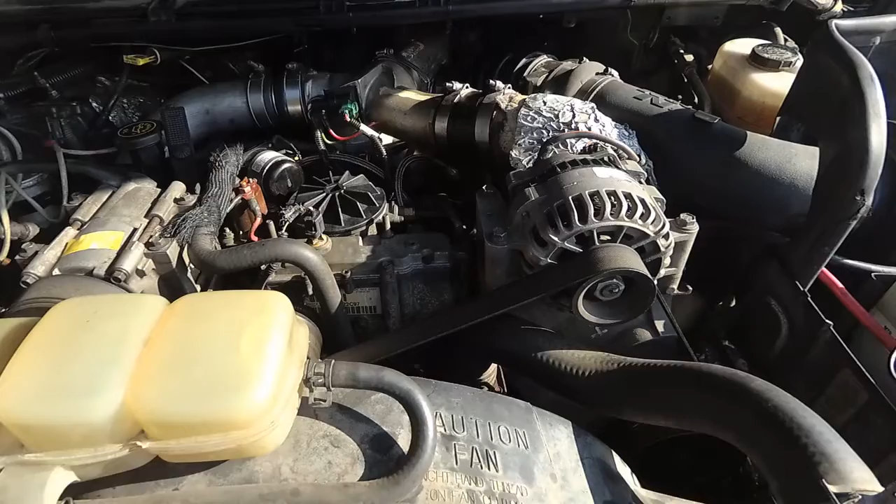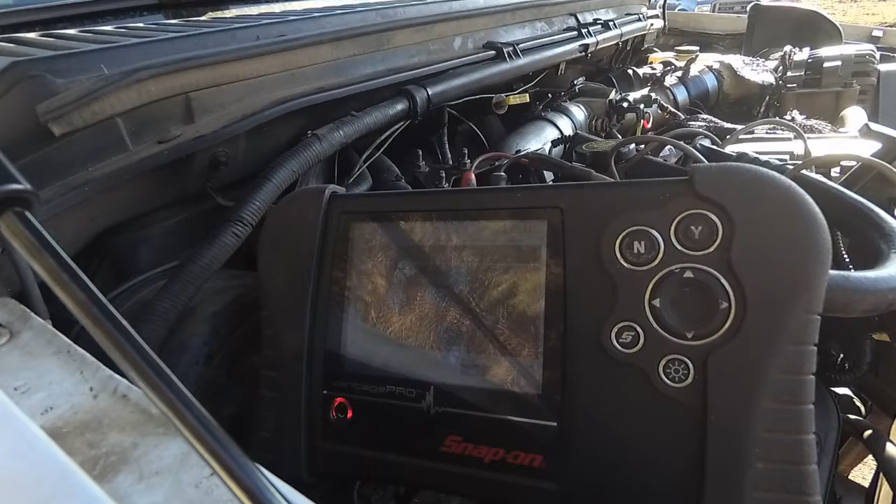So today we have a 2000 Ford Excursion with a diesel engine here. I think this is a 7.3 diesel, and it's here for a hard start cold problem. So the first thing I'm going to do here is set up the amp clamp over the glow plug controller wire and record the current that the glow plugs require, or actually take, to see if the glow plug system is functioning. I find that to be the most effective approach, and if the current is low, then we'll individually check the glow plugs.

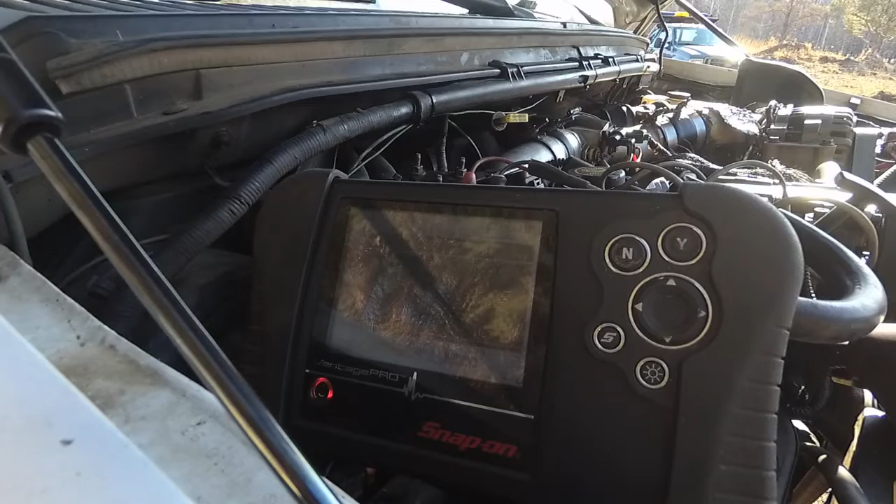At the same time, I'm going to set the scan tool up to record actuation oil pressure during cranking and engine RPM. So we'll get that set up and we'll give that a try. I'm not worried about having to watch this graphing meter because it's recording right now. I'm just going to zero the amp clamp. There we go. Half an amp right now. Okay, so we'll set up the scan tool now. So that's a good start.

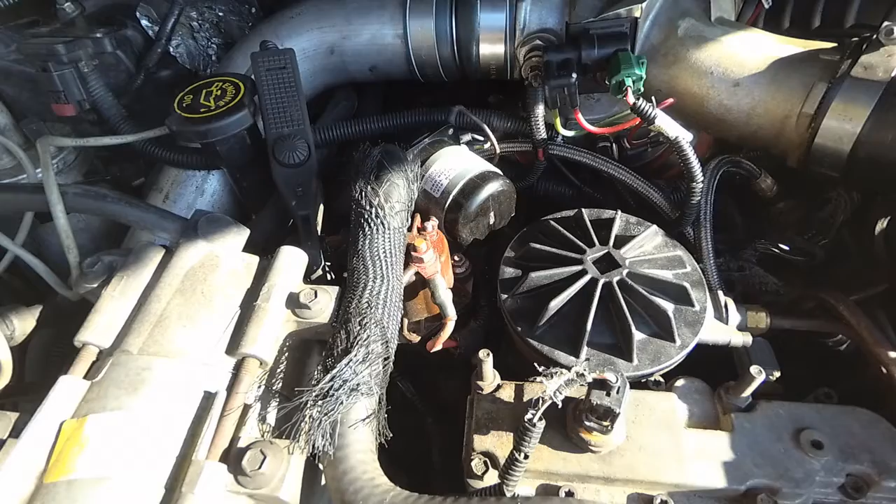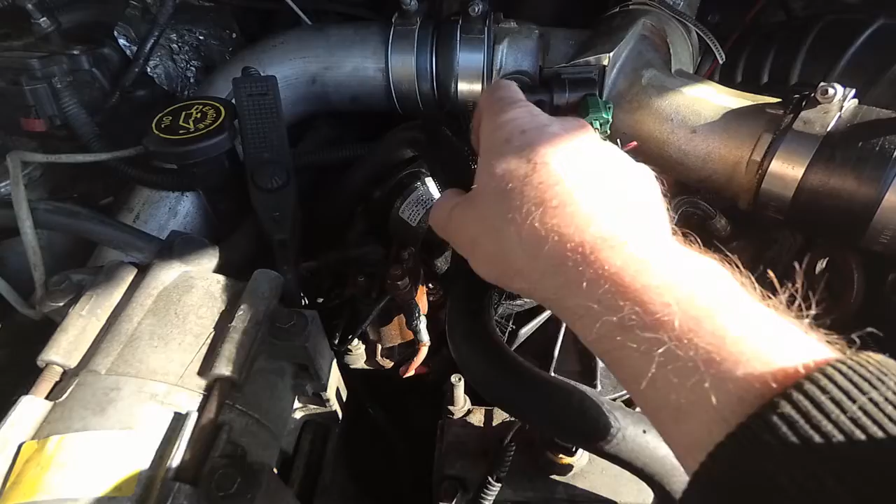First thing we noticed is that the glow plug controller did not energize. So we had no current flow. So we obviously have no glow plug. So that'll be a huge hit on starting this thing. So we're going to check this controller circuit. I'm pretty sure that one wire is grounded all the time, and this is the control here, but we'll double check that, get some test equipment out here.

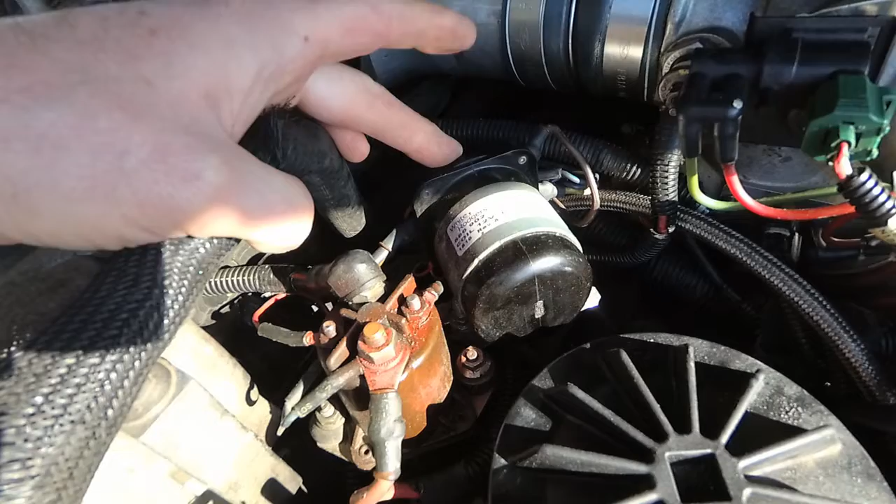Okay, so I see he's got an aftermarket glow plug relay. That's this one here. I wasn't checking that one, I was checking this one, which I believe is the intake heater, but they both should come on simultaneously. I'm going to recheck this. I never heard any relays clicking on, so I'm suspicious that the control circuit is not functioning here. This red wire should be power. I'm going to have to look at this one to see how it's designed. I'm going to get a picture of the wiring diagram here.

So here's a picture of the glow plug relay and the intake manifold heater relay. They both have the same power supply from the right side battery, and looks like the red wire would be voltage or power. Yes, 12 volts, it says right there, 12 volts on it. And we're going to make sure that that has 12 volts, and the ground side is controlled by the PCM. So there is a possibility the PCM thinks the engine's warmer than it actually is. We haven't looked at data yet.

We're going to see if we've got power on both these two red wires at the glow plug controller and the intake heater. And then we're going to look at engine data and see if the PCM is recognizing the correct coolant or air temperature, could be coolant, air, or oil temperature that it uses to establish whether it should activate the glow plug heater and the intake heater. But they're not coming on, and that's going to have a huge impact on startability. Customer did say it starts reasonably well if it's plugged in.

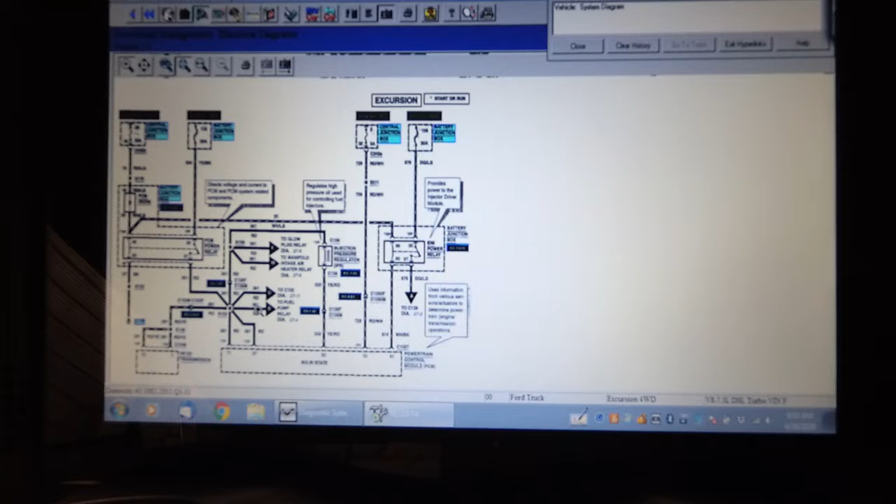So the power supply for both those two large relays comes from circuit 361, the red wire, and that is supplied power from the PCM relay. I'm sure that relay is working or the vehicle wouldn't even start, because that relay supplies power to the powertrain control module. So we want to make sure we have power there at the glow plug controllers, on this circuit with the key on, and then we're going to look at data.

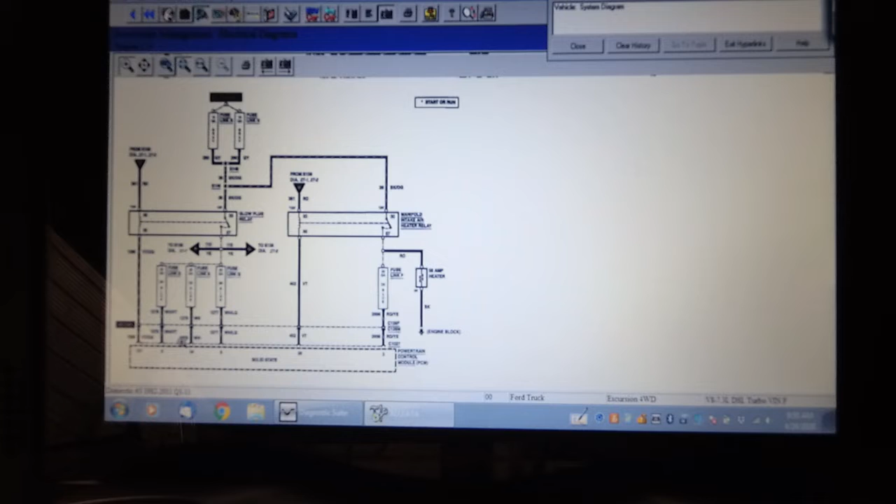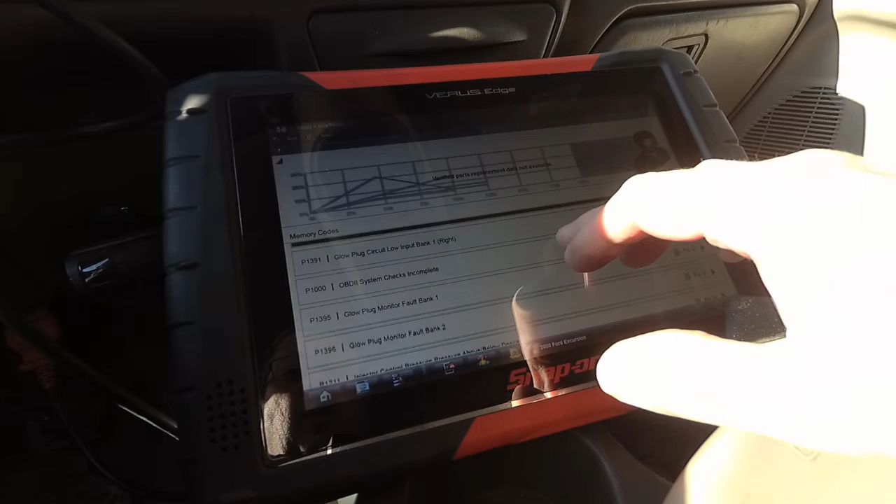So with the ignition key in the run position, I do have power on circuit 361, the red wire on the intake manifold heater and the glow plug relay, and we have 12 volts on the control side of it as well, which means there's no ground. So let's look at data. First thing we're going to do is check for memory codes here. Oh, look at that. Glow plug, glow plug, glow plug, and ICP pressure above normal. Well, high ICP pressure won't cause a no start, but these glow plug issues might. So I don't know if those codes were generated recently. Let's clear them.

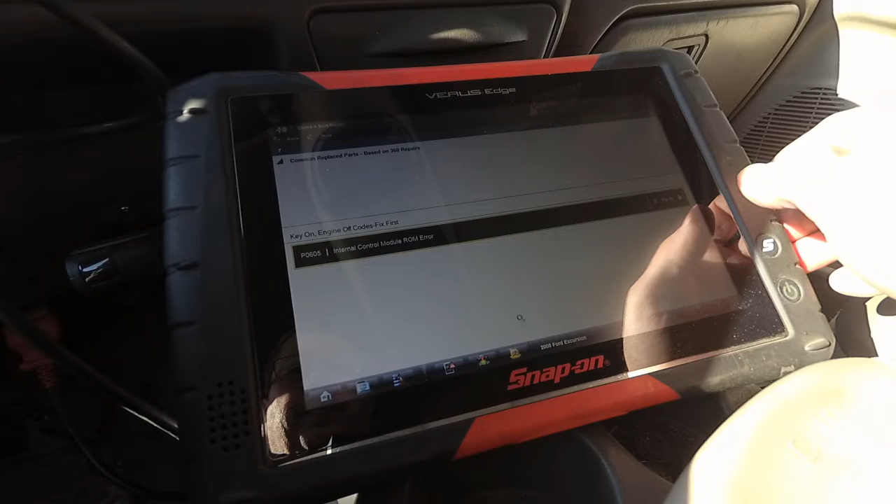I haven't cranked this thing yet. And exit. And let's do key on engine off self-test. It'll probably flag a code for being too cold, but it should test the glow plug circuits. Internal control module ROM error, but no glow plug codes. Alright, we're going to look at data.

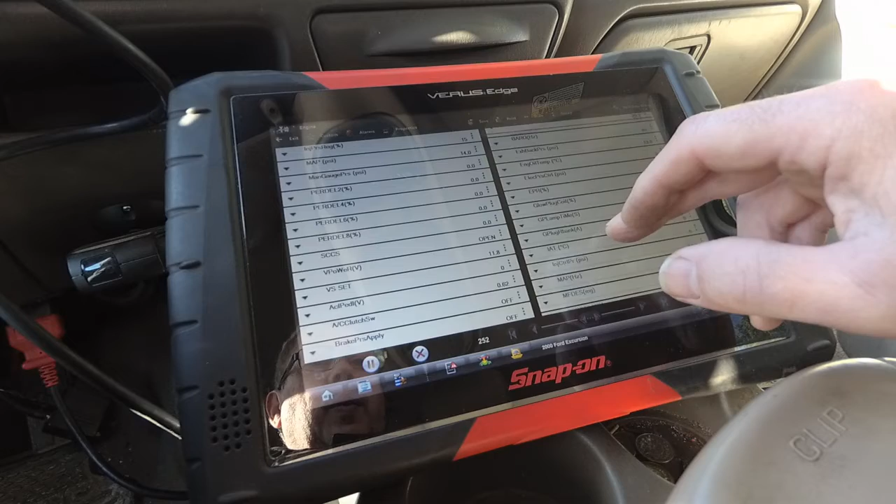So I'm looking in the data list here, and I see engine oil temperature at 4.4 volts and 3 degrees Celsius, which is about right. Intake air temperature 5 degrees Celsius. And let's see if we can find engine coolant temperature. I don't see it in here. Intake air, oil temperature, no, I don't see it. I'm going to build a custom data list.

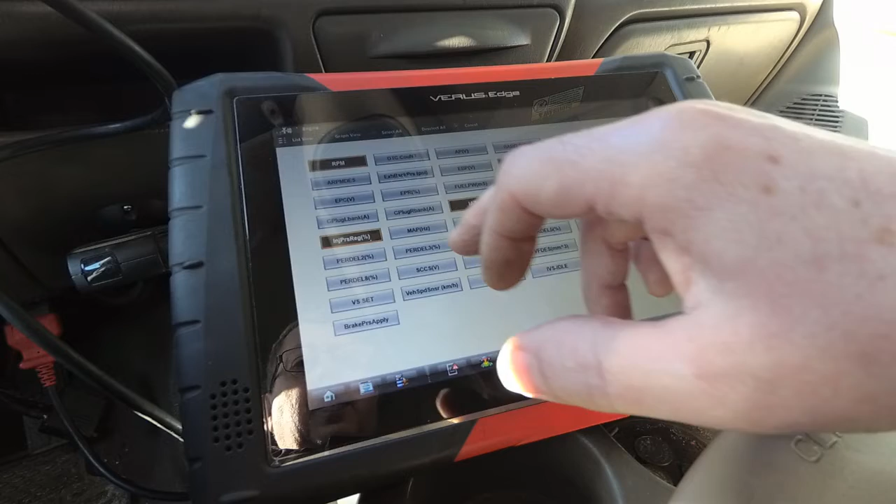Deselect everything. I'm going to go RPM. Oil temperature. Might as well take it in voltage as well. Glow plug percentage, glow plug time. Intake air temperature, ICP, injection control pressure, and the regulator. And I guess it doesn't have an actual coolant temperature in this data list.

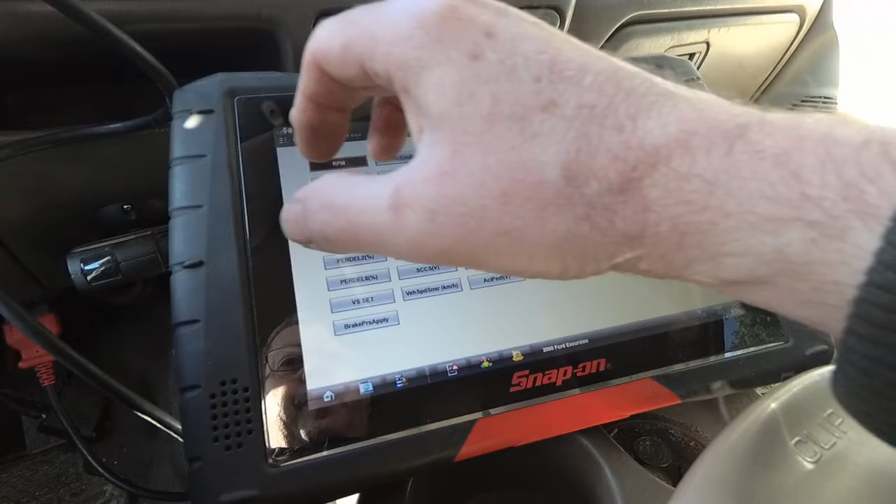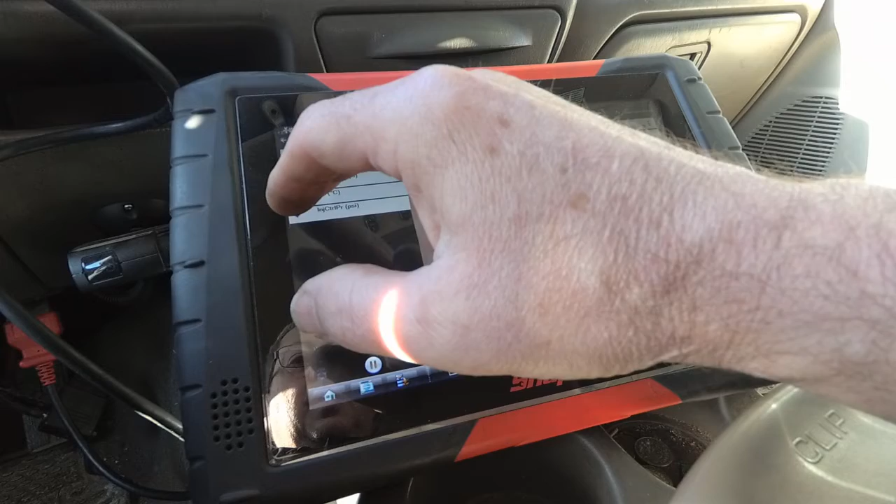So the temperatures look reasonable. Let's see if it's actually commanding the glow plug on time. Right now it says 0. I'm going to cycle the key. Hopefully we don't lose the data list. Yeah, see, it's commanding it on, yet it's not working.

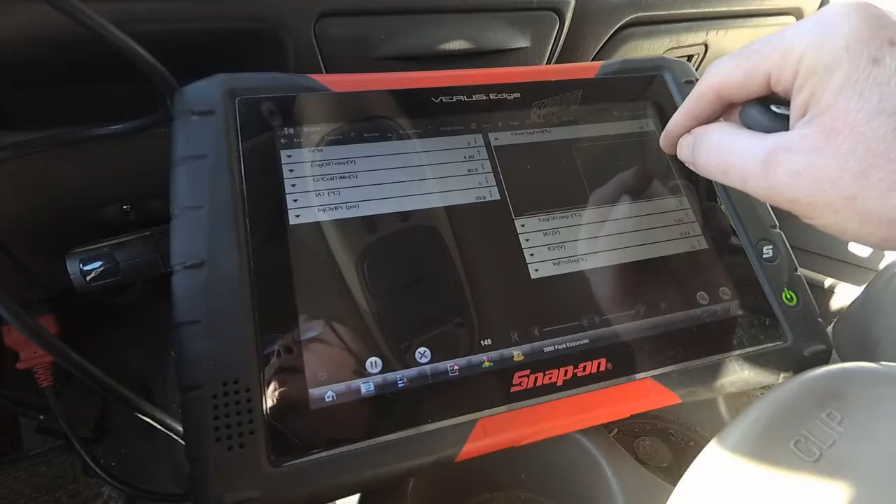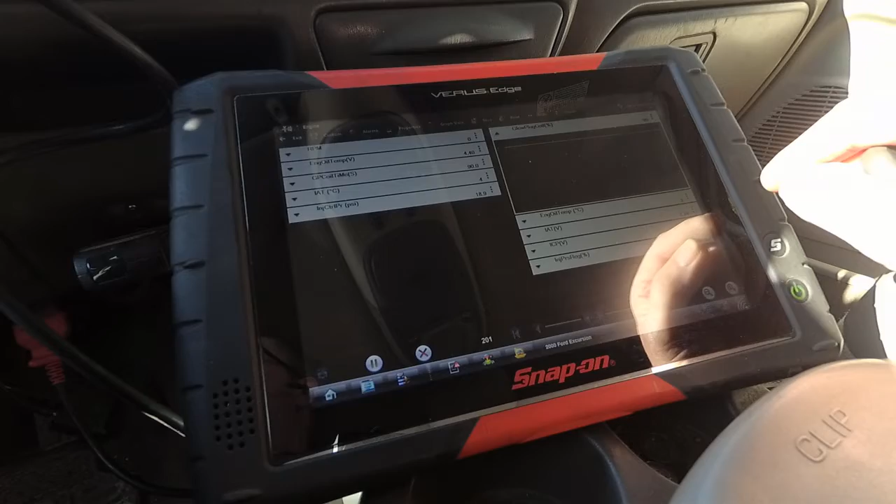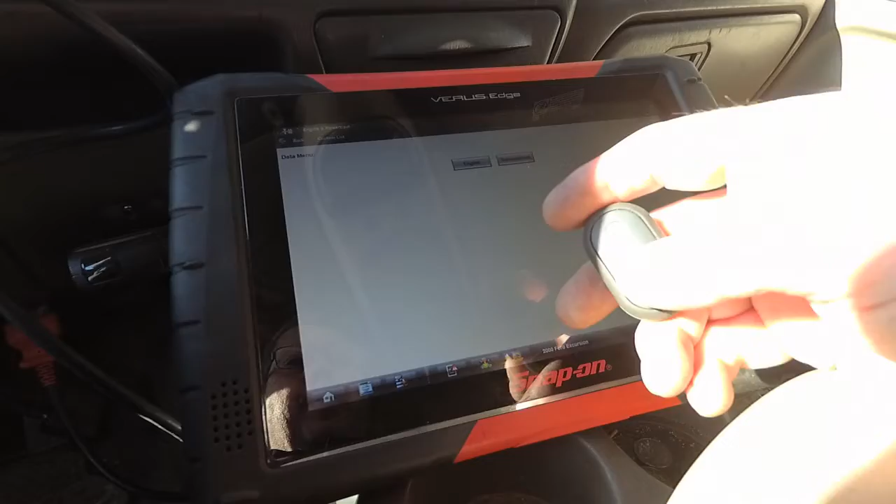So hard to see the dash indicator in here with this sun shining in here today. Well, it's commanding the glow plugs on, but it doesn't appear to be working. Look for a bidirectional test here. So here is a glow plug test, including power accessories. Continue.

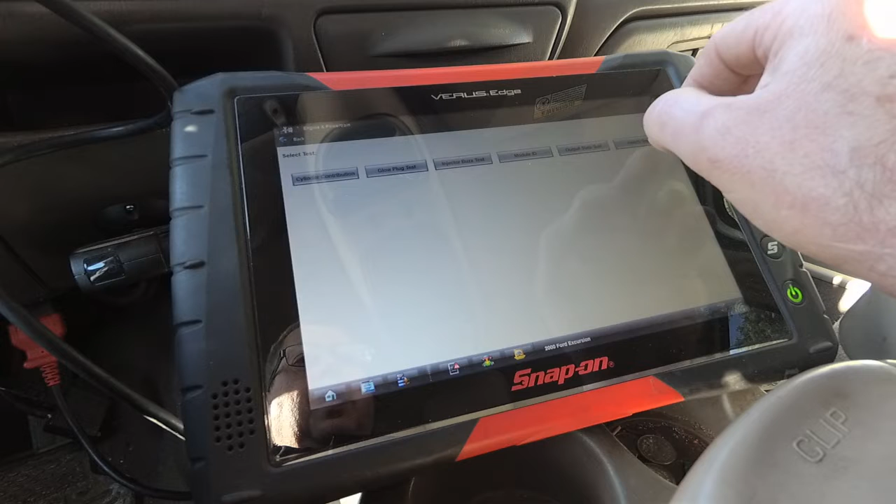Battery voltage must be 11.8 to 14. Test abort. It's supposed to do this test running. Well, let's put a test light across that circuit. There's no other bidirectional control of output state. What does that do?

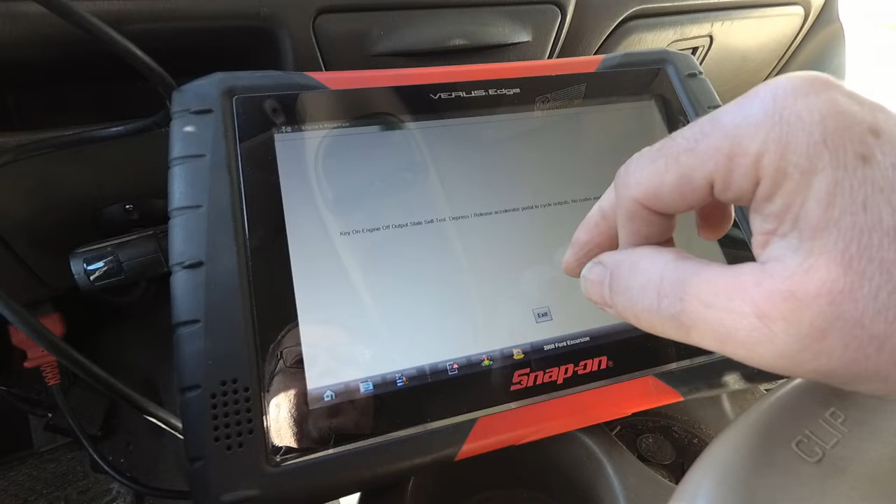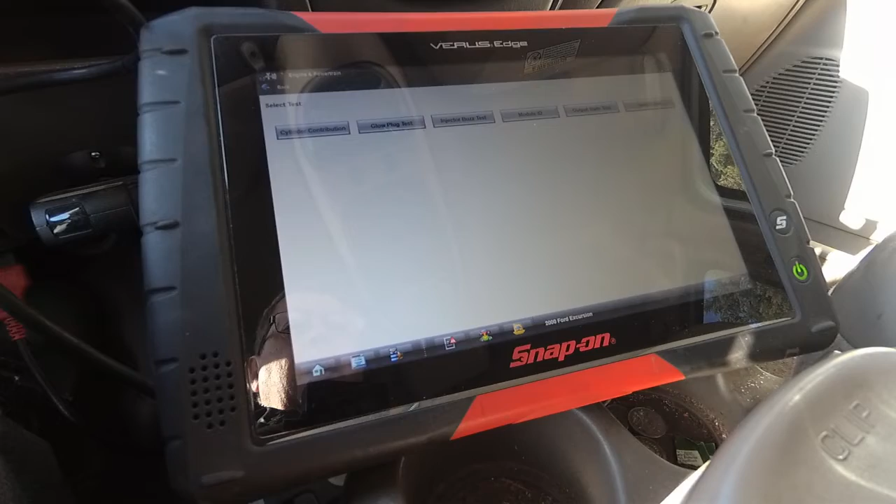Engine off, turn off AC and all accessories. Release accelerator. Okay, so that should energize various. You can hear the lift pump running. And every time you cycle the key. To press brake pedal. Alright, well that doesn't do it. Well, let's see if we got a ground on that glow plug controller.

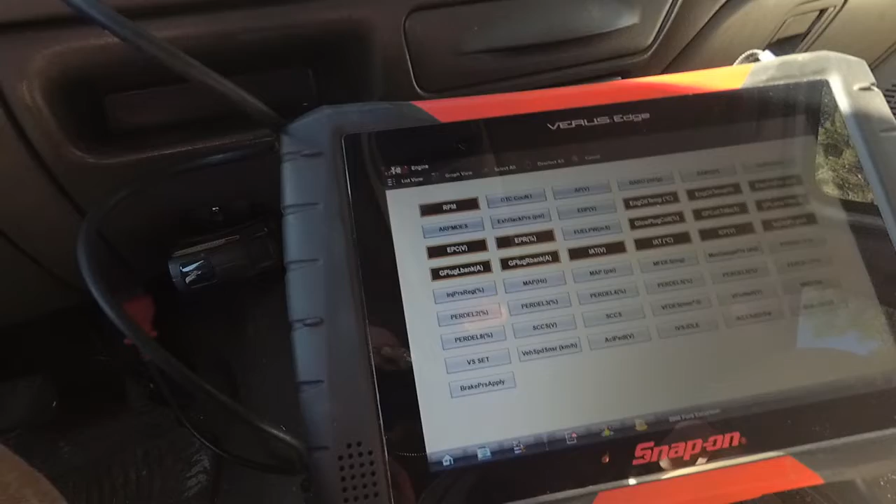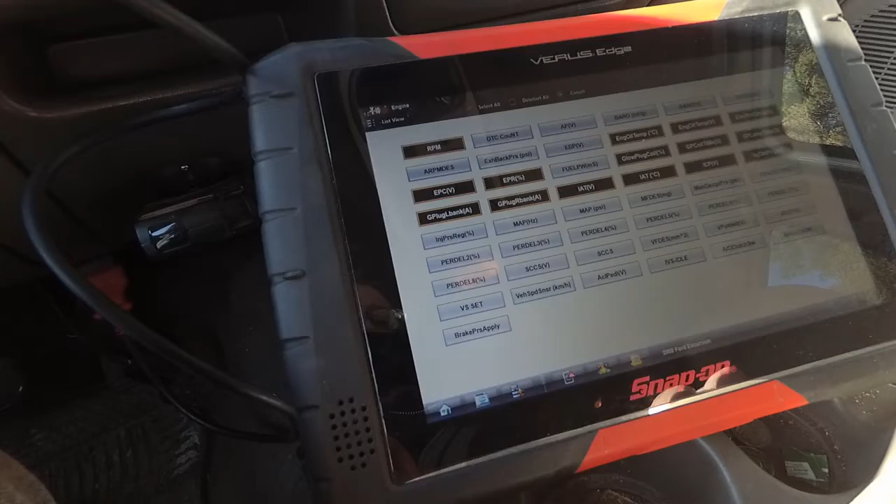So I've determined that the PCM is not supplying the ground to the glow plug or intake heater for whatever reason. So I've got a remote start button hooked up so I can remotely ground those two relays. When I do, the glow plugs draw 160 amps and the intake heater I think was 35 or 55, I can't remember. So I'm going to start looking at data here. I'm going to simulate a normal operation of the glow plugs and then see how this thing starts.

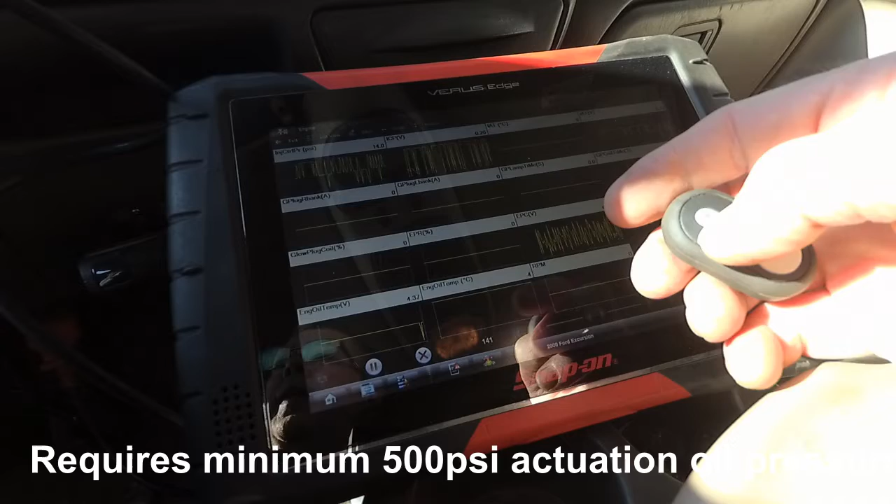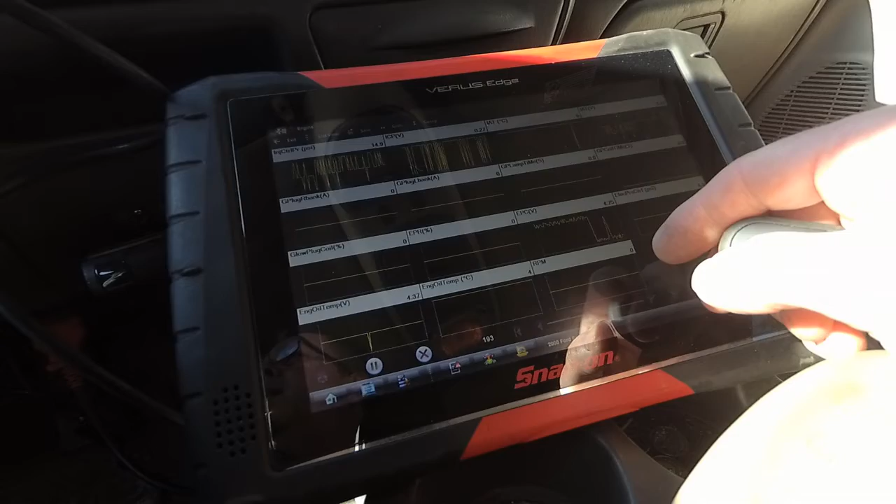Get set up here. Sorry for the glare here, it's quite bright. So where's actuation oil pressure, injection control pressure right there. This needs to hit at least 500. Okay, so I'm going to put the glow plugs on. Should be enough time, I would think. We got oil pressure. We got 500 pounds of oil pressure.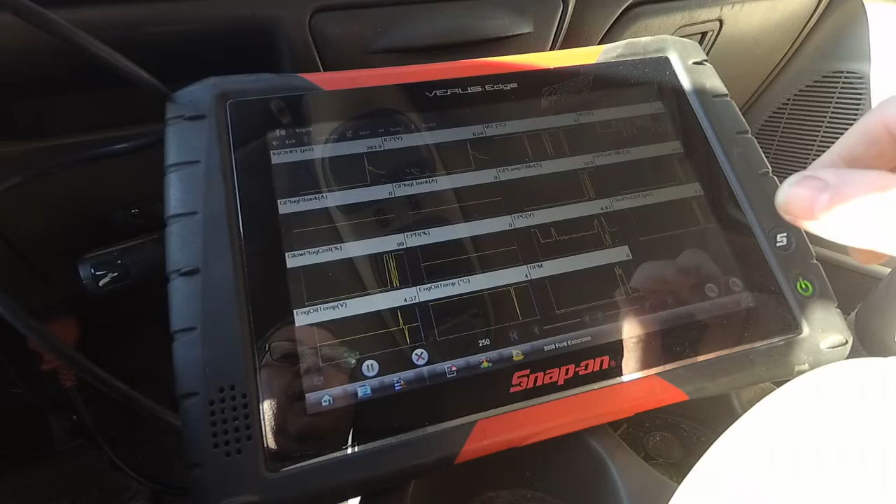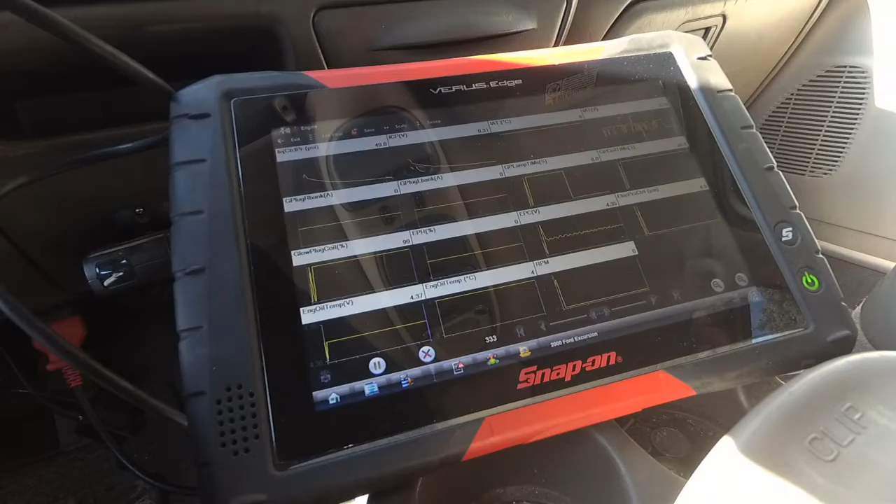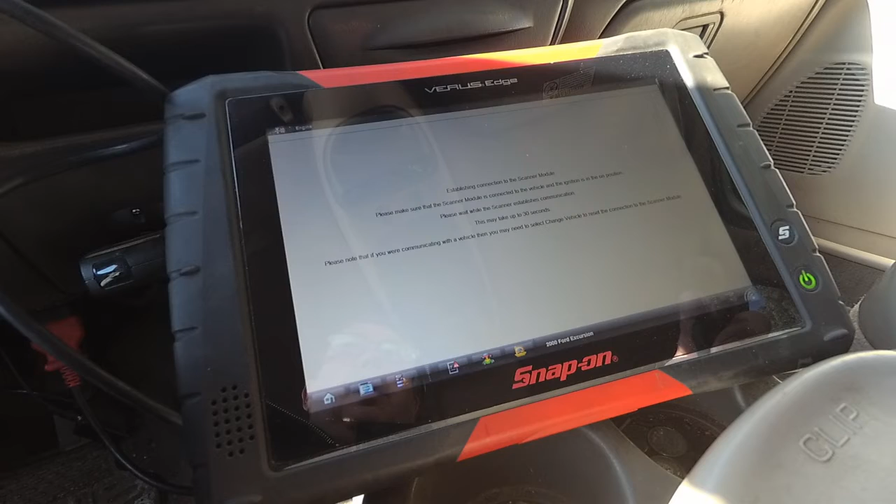Let's try cycling the glow plugs again. It's certainly not cranking very fast. Where was engine RPM? 106, that's not fast enough. No, it's never going to start. It's not cranking fast enough for one thing, but the glow plugs aren't working. The battery voltage went so low it stopped the scanner here. So let's get a booster battery out here and see if we can try again.

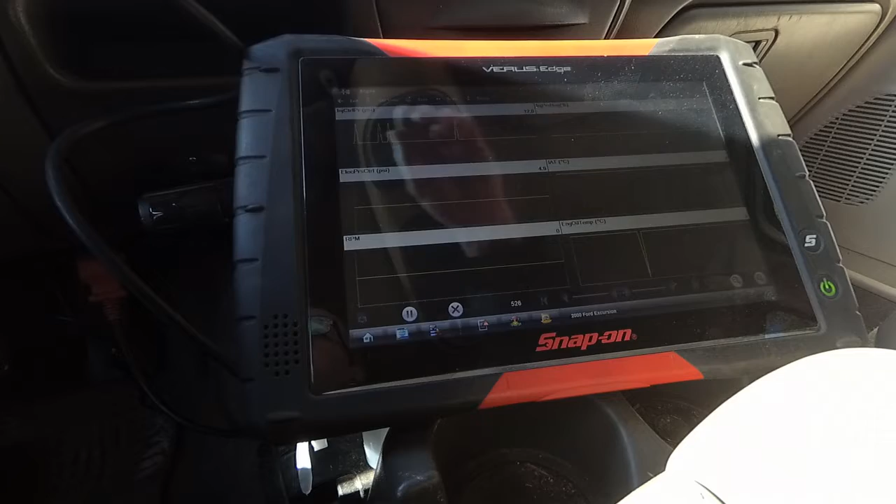Okay, so I got a booster battery hooked up to the right side main battery, and I got the jumper switch set up to bypass the PCM control of the glow plugs and intake heater. I'm going to turn them on now. I believe they're on. 1003, 1004, 1005, 1006, 7, 1008, 1009, 1010.

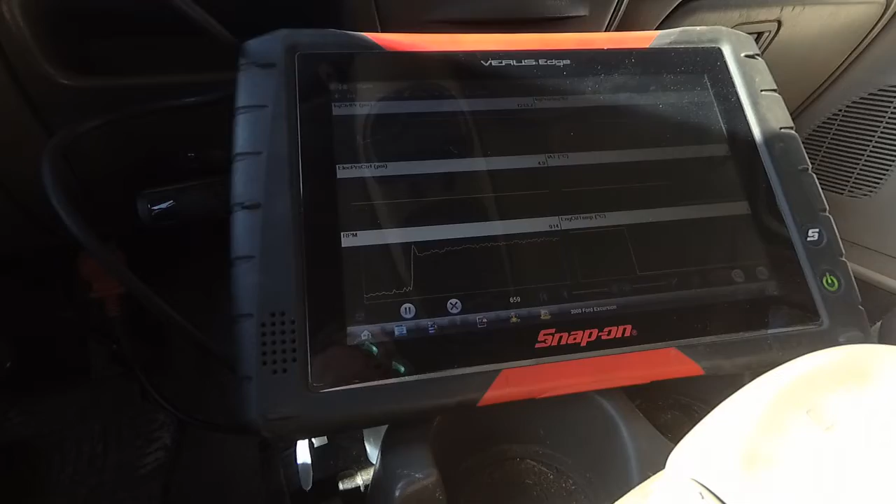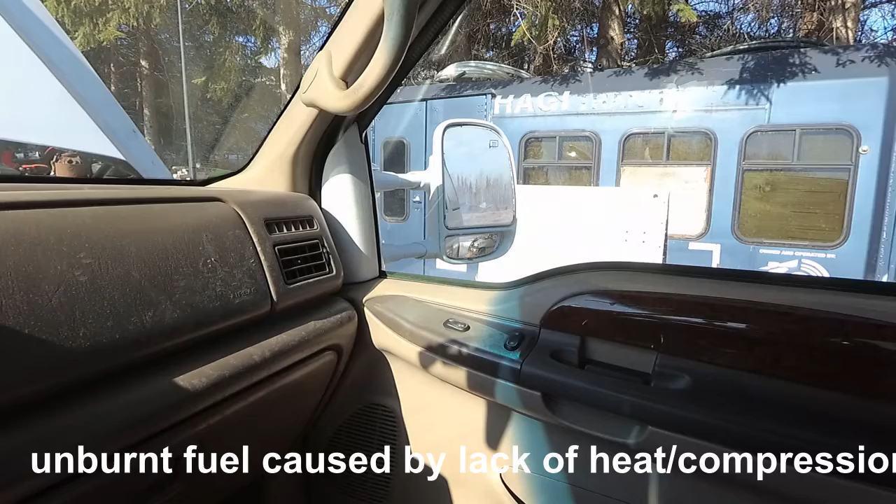It's got a miss in it now. Blowing a little bit of white smoke out the exhaust. See the white smoke? So it's got at least one glow plug maybe not working. It's also got a knock in it like an injector issue. Well, at least we can get it in the shop now and work on it out of the sun here where there's less glare. So it's in the shop now, semi-warm.

I ran a cylinder contribution test and it fails number 8 cylinder for balance. It also has this intake heater fault code. So there are multiple problems with this thing. There's either wiring issues or driver issues for the intake heater and glow plug control circuit. It has an injector knock. It might have low compression in one or more cylinders. We'll have to do further testing. And the batteries didn't allow it to crank fast enough to start if it had everything else going for it.

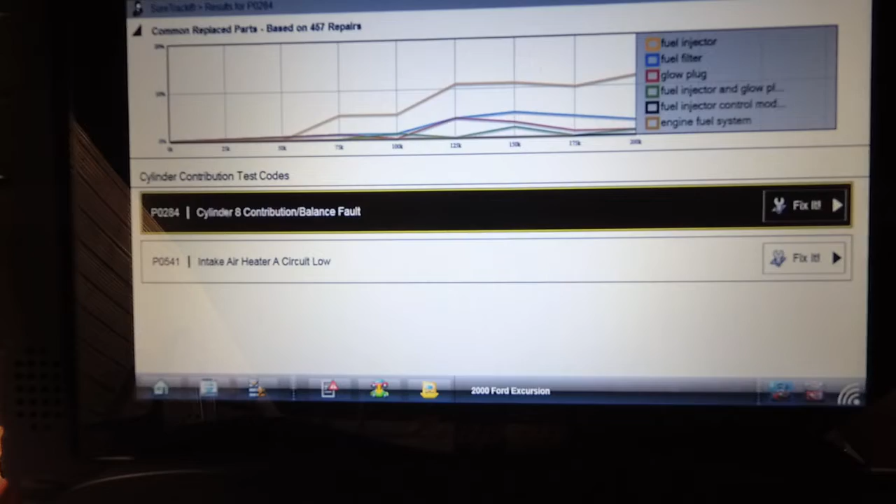One thing it does have though, we're going to look at the data that I recorded here. So I retested this aftermarket glow plug controller and it is being commanded on by the PCM, and initially draws over 200 amps. Mind you, now I have a battery charger hooked up to it, so the battery voltage is a little higher, so the current would increase. But this intake heater relay is not being commanded on, so we're going to have to check the quality of that circuit back to the PCM, and it's setting a fault code for that circuit as well. The other issue is the batteries are just weak and it's not cranking fast enough. We'll have a look at the data that I recorded on that cold start.

So here's a review of the data that was recorded during that starting event, and even with the booster battery hooked up to it, you can see that the RPM during cranking was only 106, 84, 90, 100, 130, 114. This thing should be cranking at about 200 RPM. RPM is critical on a diesel because of heat of compression. Low RPM, low heat. The good thing is, even at its lowest initial crank, we had 517 pounds of actuation oil pressure. So fortunately, it doesn't look like we have a high pressure oil leak in this system.

It's making oil pressure, but it's probably not making enough compression temperature because of the low RPM and the weak batteries. That, coupled with the lack of the intake heater, is really causing an issue. Now, there is a noise in the engine when it's running. We'll explore that once we get a little further here.

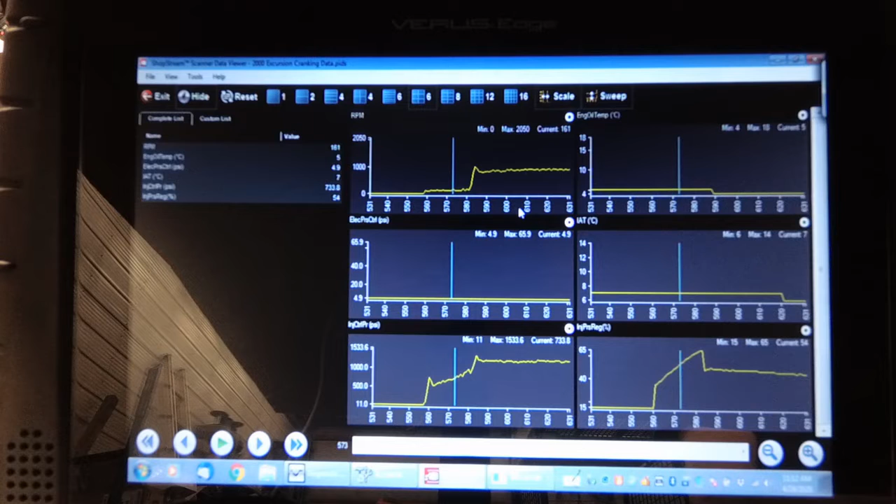I'm at connector 138 on the right valve cover. I'm going to check continuity of the wires. So we're looking at this electrical diagram, and what's of concern here is this violet wire from the intake manifold heater relay. It goes through connector 138 here. Let's see where connector 138 is. Obviously it's under the hood.

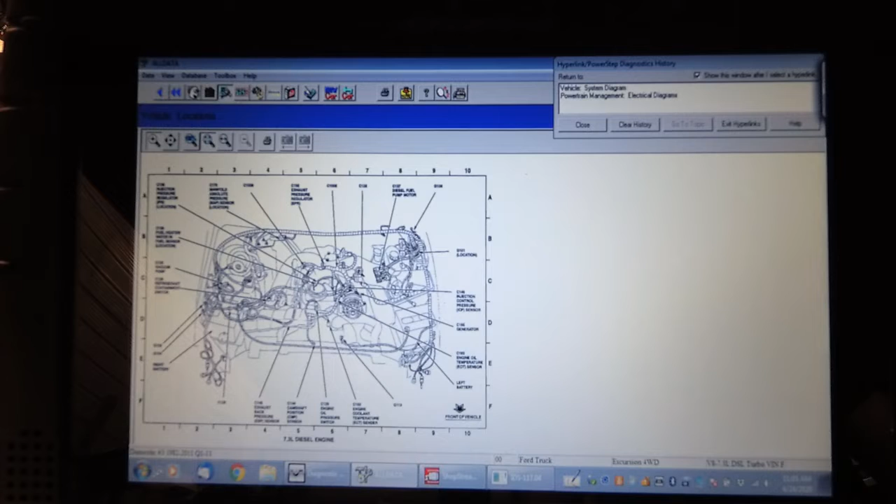135, 138, so it's over on the right valve cover. That would be a good place to examine that wiring right here, connector 138. Let's go back. Oh, I lost the diagram.

So we'll have a look at that connector and that violet wire and check continuity from the glow plug controller, I'm sorry, the intake manifold heater to that connector, and then from there to the PCM. So there's connector 138 on top of the left valve cover underneath the air induction. So I've got the air filter and air intake hose off.

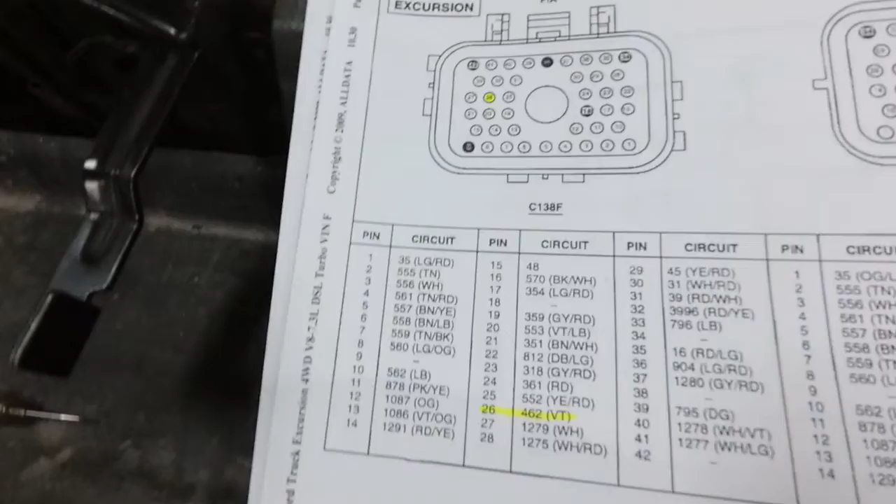So we're going to check continuity of the wiring from that connector over to the actual intake heater relay, and that is the violet wire, pin 26, circuit 462. So we'll identify that and check continuity of that wire. So we've got the ohm meter hooked between pin 26 and the control side of the intake heater relay up to connector 138, and it reads 0.04 ohms. So that wire is good up to there.

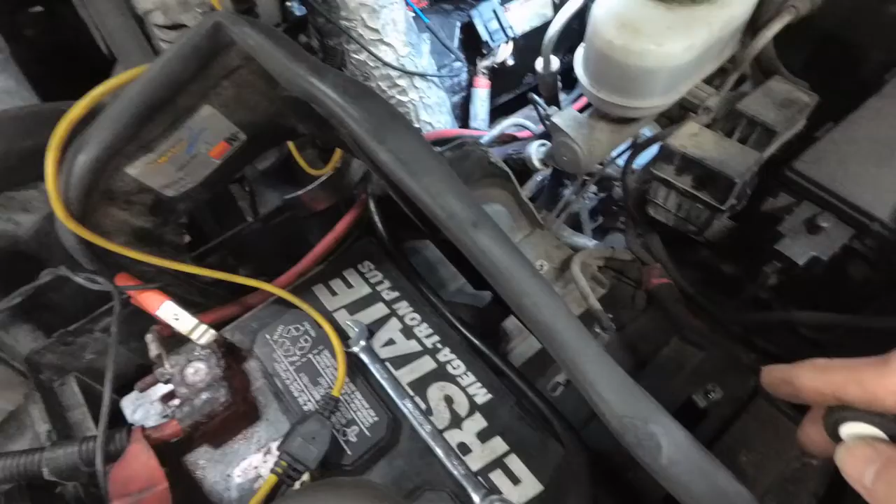So now we got to check it down to the damn computer, which is down inside the fender down there. There it is, way down there. Oh damn. I wonder which one of the connectors it is on the computer. Maybe I can get it apart. I don't see anything physically wrong with the wiring at this connector here. I looked at the back one.

So pin 26 is the third row down, second pin in, that's 27, that yellow one on the outside there, and then the next one in. And I don't see anything physically wrong with the wiring, but it very well could be open in here. You got to remember, these wires move with the engine and the vibration of the vehicle. So we'll get the connector apart on the ECM and check the continuity there.

So I decided to look up the theory of operation here. It says for the intake air heater to work, the ambient temperature must be below 0 Celsius or 32 Fahrenheit. So it was like +3 when I was trying this. So it may not have been cold enough for the intake air heater to come on. Oil temperature has to be below 55 Celsius, which it was.

Between 11.8 and 15 volts, probably not because the batteries are so weak. And automatic transmission must be in park or neutral, and glow plugs must be off. So it looks like the intake heater only comes on after the glow plug cycles off. But I do have a fault code in the computer for the intake heater.

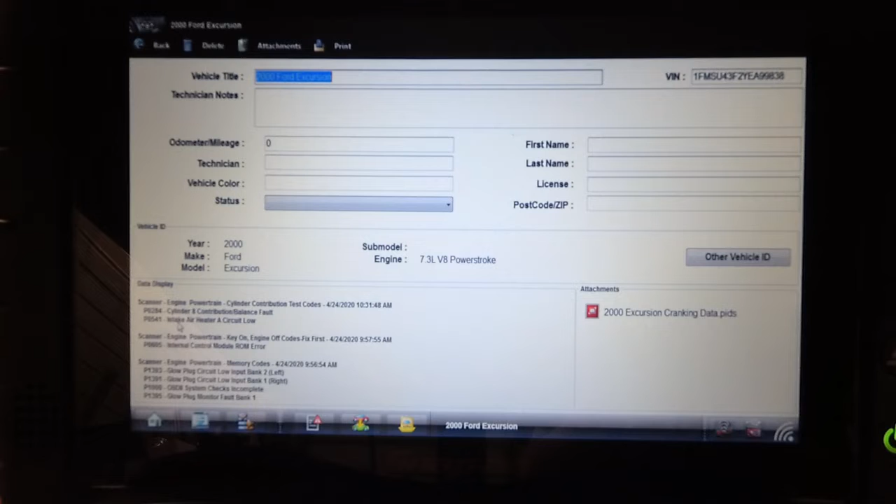So here's the troubleshooting chart from Ford's pinpoint test. It says 541 is an open circuit. It's monitoring the circuit here to pin 98 of the PCM, circuit 462. Here it says it's pink when it's actually purple or violet, I think.

So it says to go to pinpoint test KL4, and if we open that up and look at it, it says check continuity of the wire, which is what I'm doing, from pin 98 of the PCM to the actual intake heater, and if that's good, replace the PCM. So we're going to hopefully find a problem with the wiring. I'll get a pin out for the connector at the PCM.

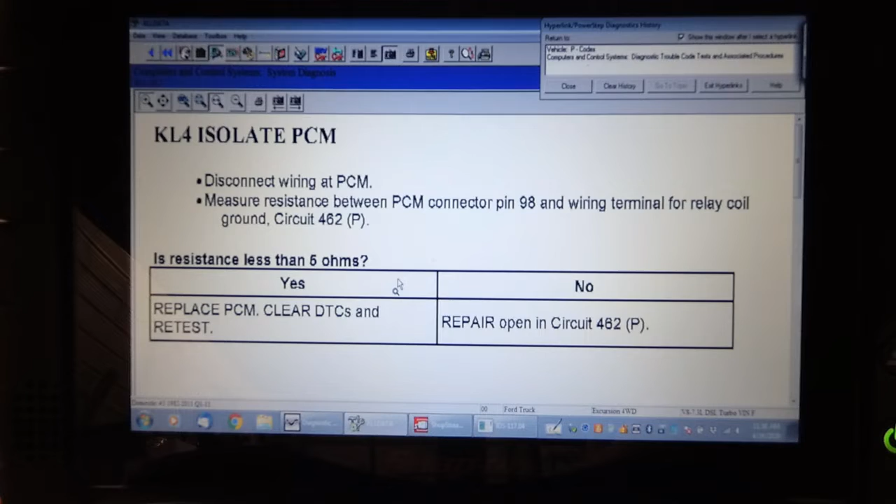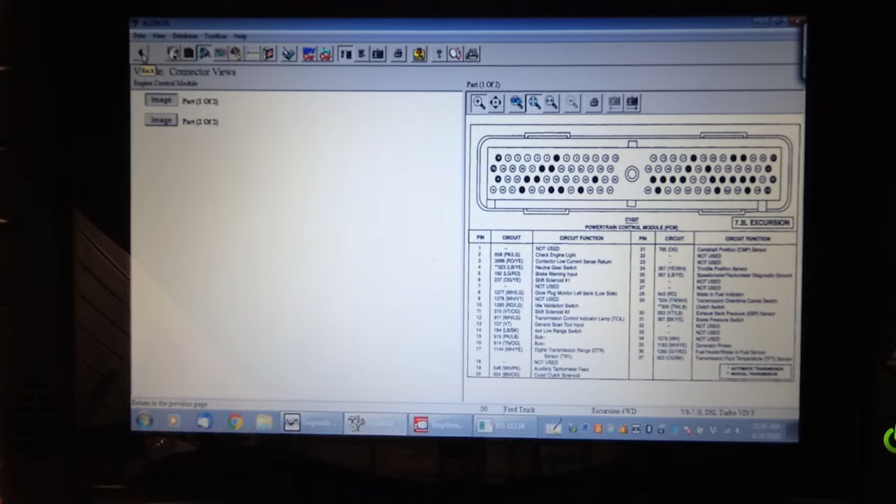So the PCM is actually inside the left front wheel well. So the best way to access that is to raise it on a hoist, take the left front wheel and fender skirt out, so we'd have to go to that. But now that the battery's charged and it's cranking a little better, I want to do a relative compression test to see if we've got a serious mechanical issue in this engine before we get carried away here.

So I got the graphing multimeter set up to record 1000 amps over 1 second, and I've got an amp clamp over the battery cable going to the starter, remote start button connected to the starter solenoid S terminal, and I'm going to crank it and have a look at cranking compression or relative compression. Here goes. Listen to the cadence of the engine.

Well, that didn't work. What happened now? Oh, I didn't have it in record. Let's try that again.

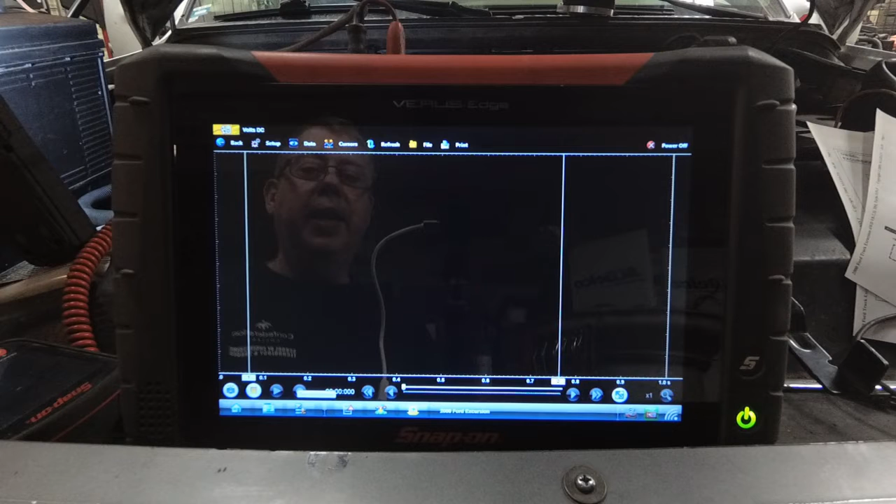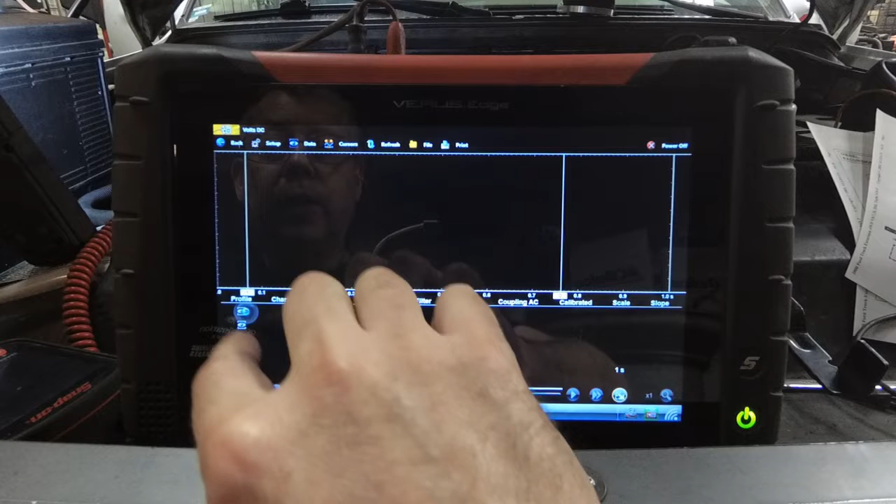Somehow I turned off channel 1. One of the benefits to this is that we can pause this and replay it and have a look at it.

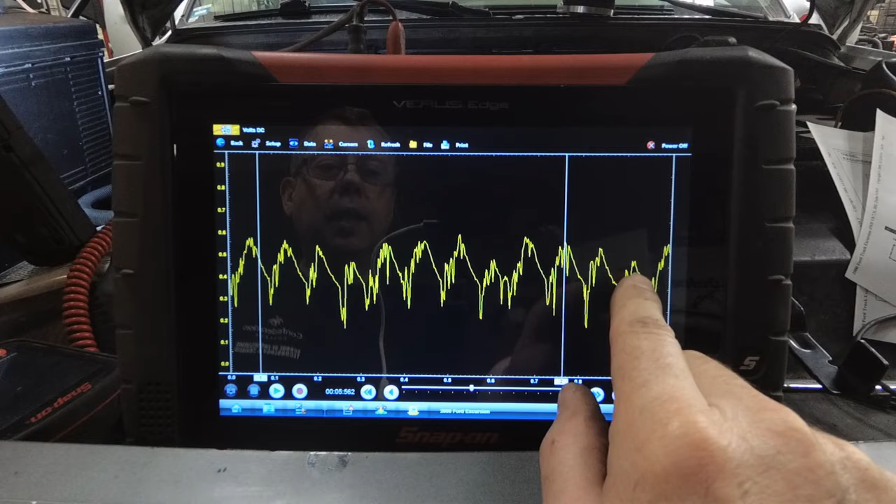So you can see there's one lower one there, two lower ones. So 1, 2, 3, 4, 5, 6, 7, 8. So that's two revolutions of the engine and 8 compression events. 1, 2, 3, 4, 5, 6, 7, 8. So there are two lower ones in here, which indicates that it's got a mechanical issue in a couple of cylinders. Repeats consistently. So we kind of knew this engine was a little tired. It does have some blow-by.

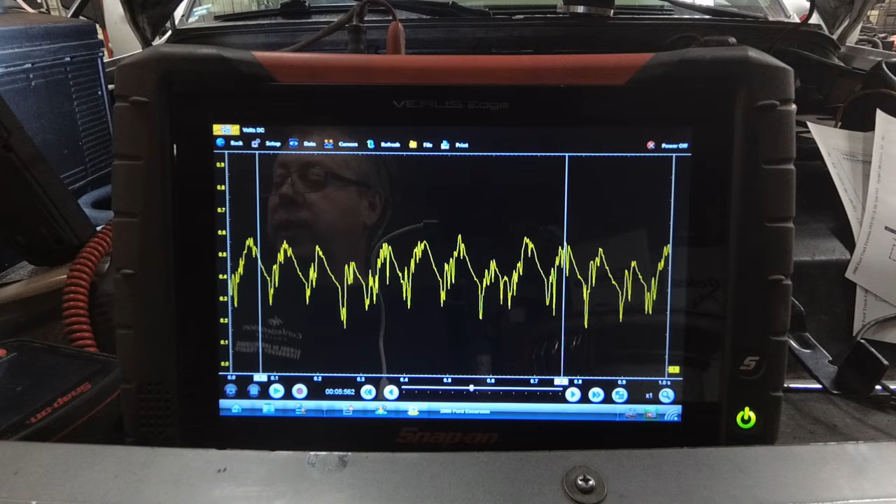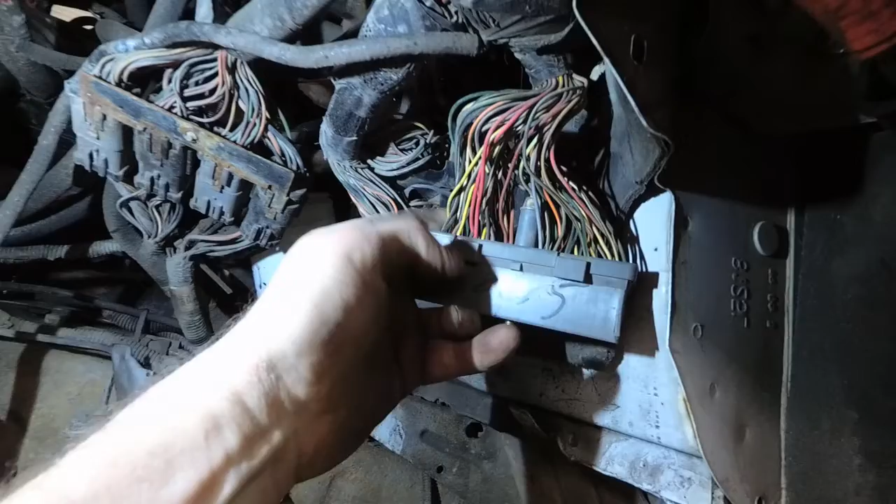I'm going to remove the inner fender skirt now and check continuity on that intake heater relay circuit to pin 98. So there's the left inner fender skirt out, and it is pin 98, which is that one right there. That's 104 at the end. 103, 102, 101, 99 is empty, and 98 is right there. Now I don't see anything wrong with this wire here, but we're going to check continuity from this wire back to the PCM, or back to the intake heater relay.

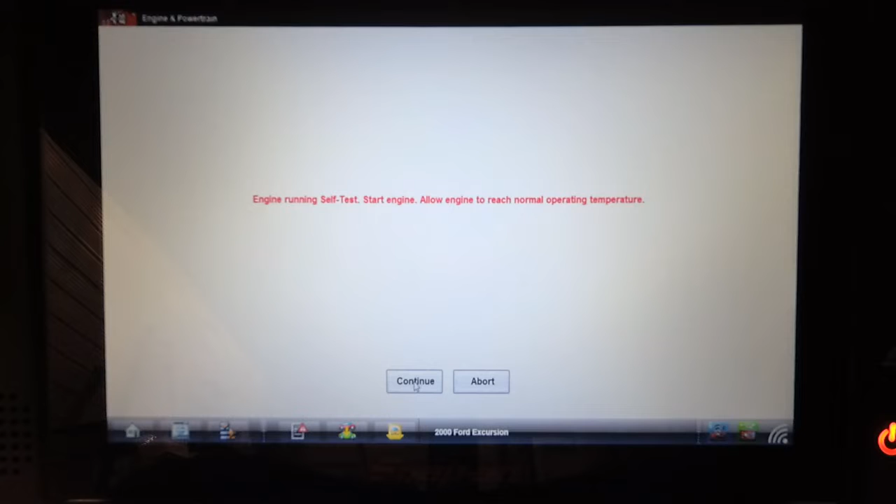Well, that's good. We have continuity from this pin to the intake heater relay through that wiring harness. I'm going to graph it while I wiggle the wires just to see if there's anything missing, if it drops out. So I've disconnected the control wire from the intake heater relay, and I'm going to try to rerun this self-test to see if it faults it. Why did it abort the test? Did I click the wrong one?

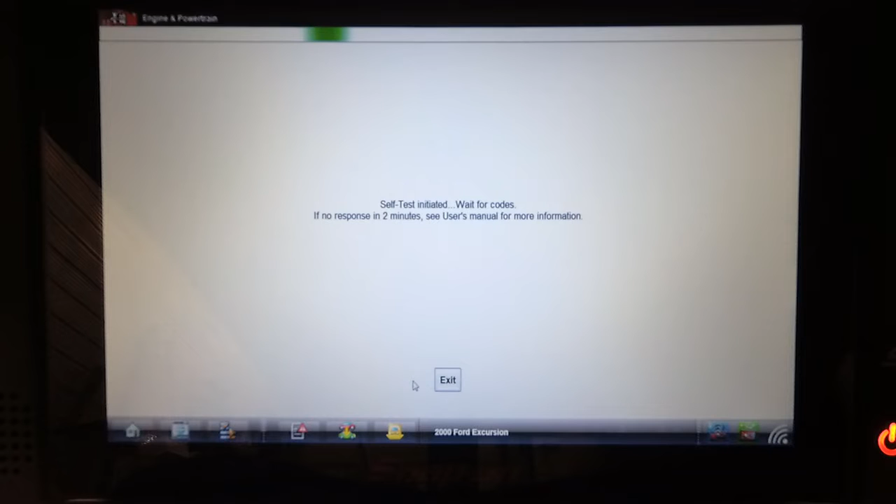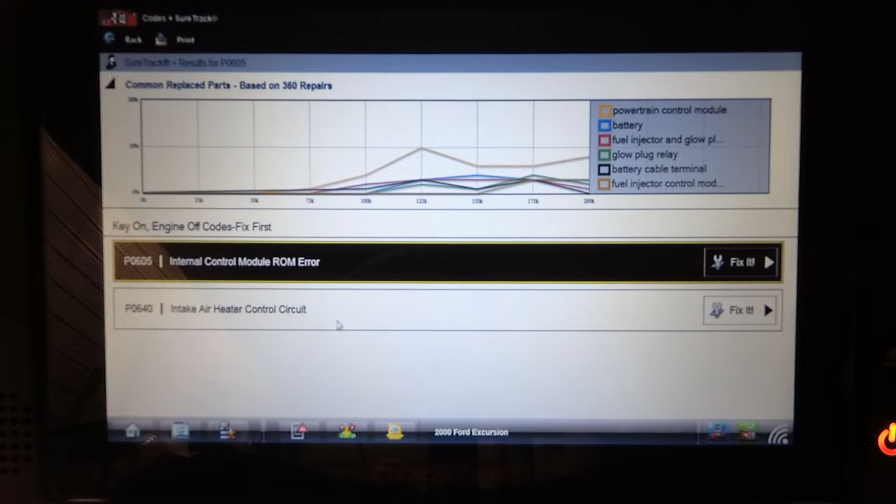If it's actually testing this circuit right now, it should show up on the scan tool as a current fault code. It is. So did I inadvertently fix this problem by cycling the connector at the ECM? Damn, I hate the intermittent problems. Well, we're going to put it back together.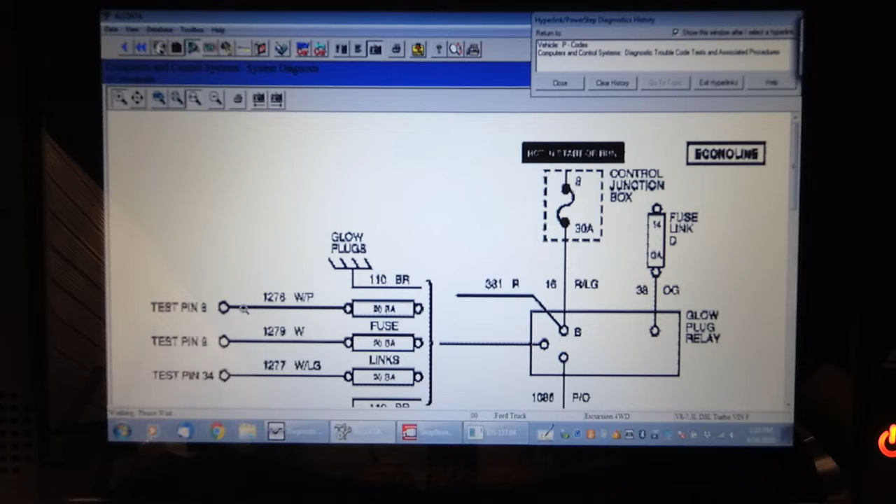So I reran this key on engine off test using Ford IDS, and it came up with these 1391, 1393 codes, which are problems with the glow plug circuits. Now, this vehicle is California emissions. It's originally from BC, and it's a unique vehicle because it's listed as California emissions. And if I look up the troubleshooting chart for 1391 and 1393, the California emissions circuit has some feedback wires from the glow plugs back to the PCM, and it says California and 49 states, the on time is dependent on the temperature.

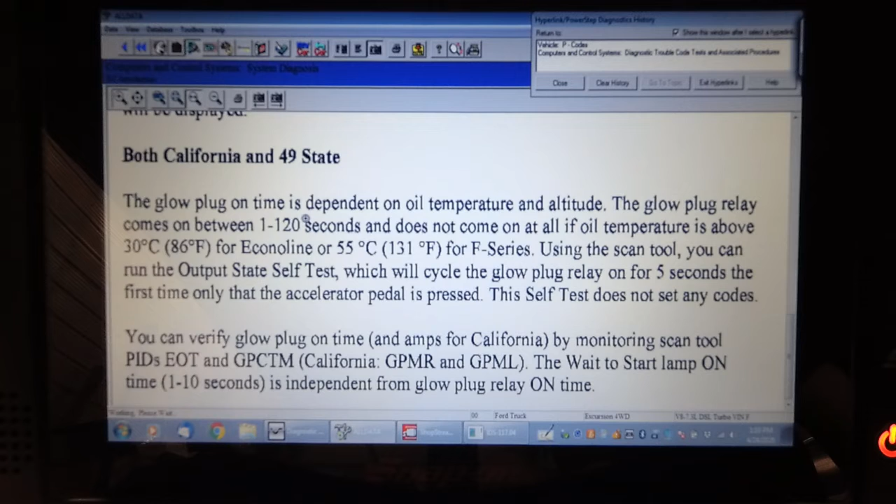Let's see what I was looking for here. Previous diagram here. 1391 is set when the monitor indicates that all 4 glow plugs are not being powered on the bank, an open in the glow plug circuits. Glow plug relay, glow plug monitoring circuit could be the possible causes. I believe this customer said he changed the valve cover gaskets, and I'm wondering if they might be different for California emission vehicles, because going through this troubleshooting chart here it says,

I read someplace that only the California emissions system, here it is, glow plug monitor self-test, California and 50 state only, is a functional test of the PCM performed on demand when the engine is running. So I'm going to look and see if there's a difference in those valve cover gaskets which contain the circuits for the glow plugs. When I measure the glow plug current, it indicates that they're all working.

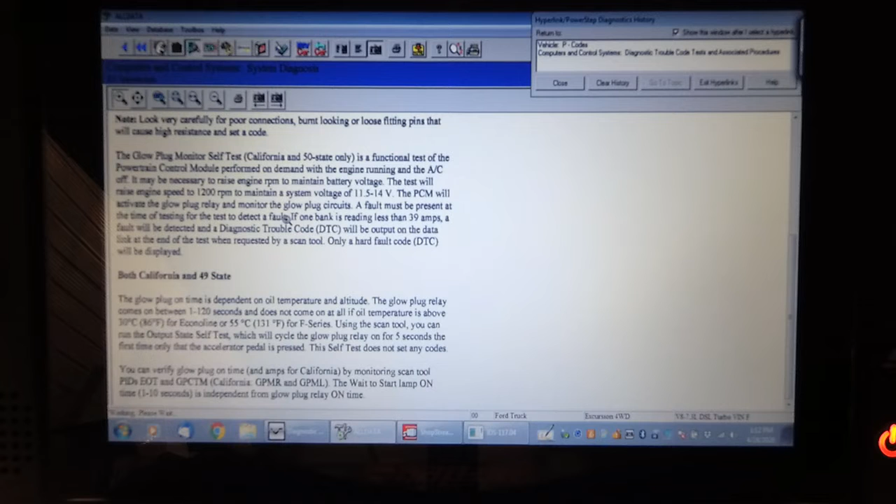So I checked with the Ford dealer, and the valve cover gasket's only listed as 1. For some reason he couldn't decode this VIN, but it definitely says California emissions on the hood. As I mentioned, the vehicle did come from BC, so they often have California emissions because of the close proximity to California. My understanding is these monitor codes only exist on California emission equipped vehicles, so I don't know if this has something to do with the tuner, or previous repairs. I know the glow plugs work now. I'm going to talk to this customer and see if we can get some direction.

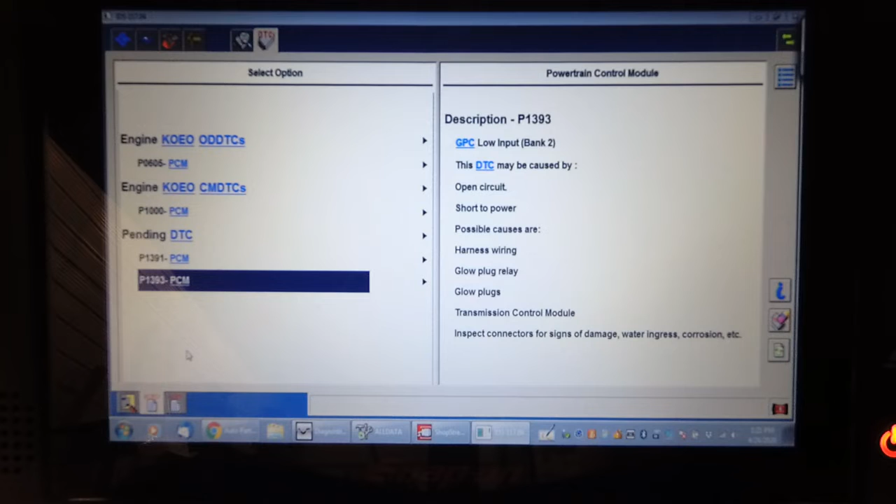So I found some information on the P1391 and 93. I was right. According to Ford, this circuit is only used on California vehicles, and it's basically 3 small wires protected by fusible links at the glow plug controller, or the glow plug relay, and make sure they're on the right terminal. So I'm going to have a look at that.

So here's the glow plug controller. This is the input wire coming in. We don't have a ground. Well, it don't matter. This is the main feed wire coming in. This is the output wire to the glow plugs. Brown to the left side, the yellow to the right side here. And then there are the 3 fusible links that you can see here attached to the monitoring wires.

Now it mentions something about there being a shunt, and I would imagine it expects to see a voltage drop across that shunt based on the current flow. But I don't know if that's been removed or modified, because this is not an OEM glow plug controller. We're going to have to find out. I don't think those fault codes are going to create a problem other than turning on the MIL after 2 drive cycles. We'll see if we can find any more information on this shunt circuit.

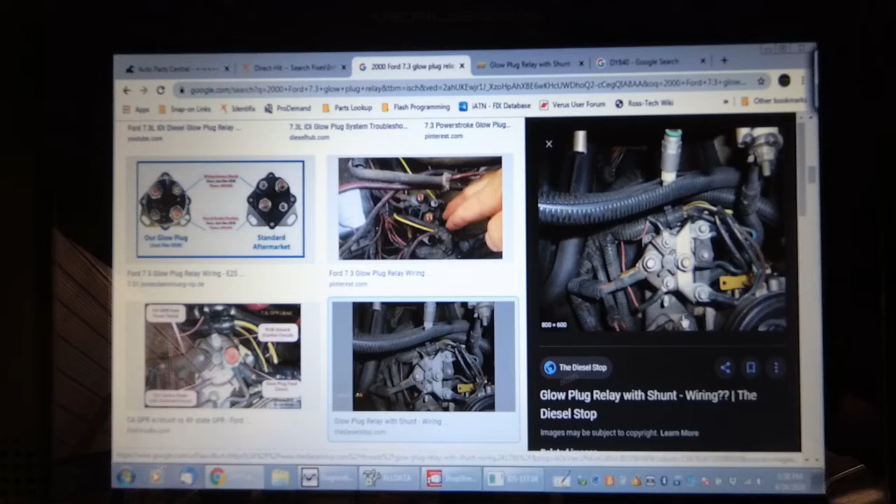Okay, so here's what I've come up with. When they removed the factory glow plug relay, which looks like this guy right here, they did not install or transfer this shunt bar to the, looks like a White-Rodgers relay that they installed.

So it's missing this shunt, and the way this thing works is the computer is going to measure the voltage on the output terminal of this relay, and it's going to read a voltage drop across this shunt here on the left side and the right side, and if it sees a voltage drop, obviously affected by current flow from the glow plugs, it would know the glow plugs are theoretically working properly. What they've done is they've connected all 3 of the output wires plus the 2 glow plug control wires to the same stud, so of course it's not going to see a voltage drop.

I checked with the Ford dealer, and I was able to find the part. They call it a shunt, and the part number is a DY840, but I'm missing the Bakelite stud location. I don't know if I could make that circuit work. Plus there's not a lot of room back there for this thing. I'm going to see if the customer still has the original glow plug relay.

So here's what I did. It's missing the shunt, which is a little metal strap with an insulated stud, and the left and the right glow plugs go off of each insulated stud. There is 1 wire, I think it's yellow with a green tracer, that goes to the middle stud, which is a feed. So I simulated a voltage drop by wiring in 2 194 side marker pigtails, and it runs the glow plug control test now and passes because it sees a voltage drop on the output circuit, thinking that the glow plugs are functional and there's a sufficient current flow.

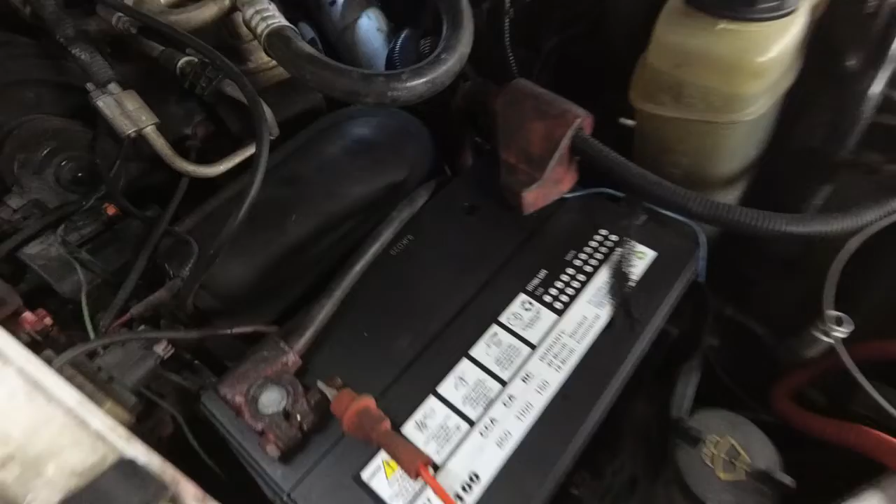It's not the proper fix, but it'll get it past setting a fault code and turning on the check engine light. And if the glow plugs are working, that's all that's really important anyways. So we're going to put this thing outside. I put 2 fresh batteries in it. We're going to put it outside and see how it starts in the morning.

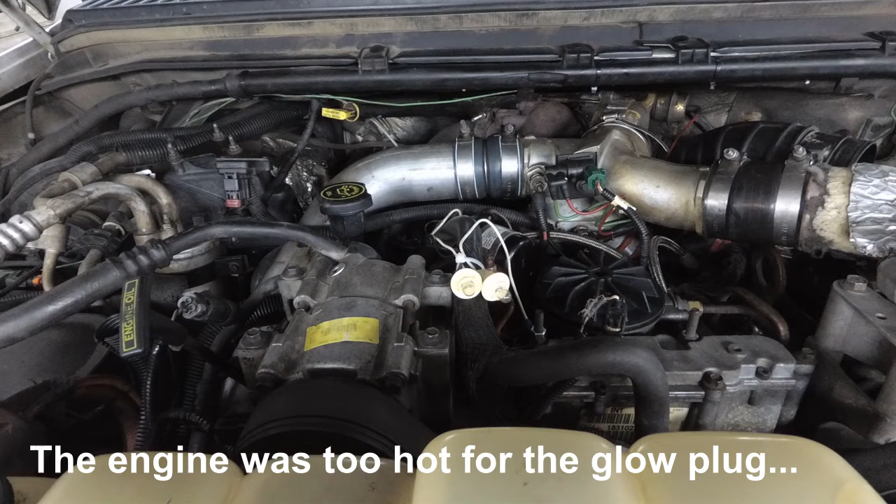So another advantage of this workaround here is that these 2 little 194 marker pigtails are going to act as a test light to tell me, or anybody else, when the glow plugs are working. To cycle the key, I think the glow plugs will come on. Well, the wait light came on, but I didn't see the indicator light come on, or these 2 lights come on. Well, we'll see how it starts tomorrow.

So I ran a cylinder contribution self-test using Ford IDS, and it comes up with the same information the Snap-on scanner gave me. Cylinder 8 contribution balance. It has a bit of a lifter or an injector type knock. Now that problem could be injectors, but the relative compression test suggested there were at least 2 cylinders that were a little bit lower in compression based on the current draw. So this thing needs some mechanical repairs in the engine, as it suggests here, compression rings. But, well, we're going to start with a couple of batteries, I believe, and see if it improves cold starting tomorrow.

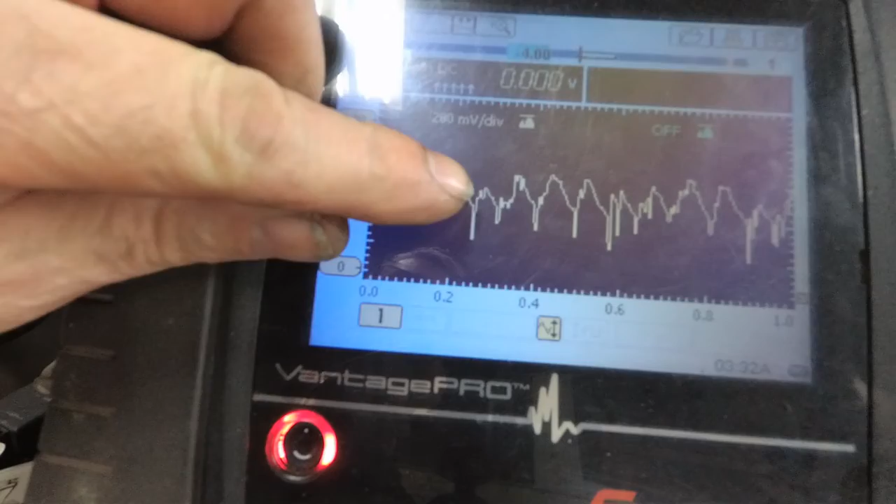So I was going to try to repeat this relative compression test and sync it with one of the injectors, but I have no way to disable the fuel system and not have it start. You need injector pulse for a sync, but if you have injector pulse, it'll start. But I took the oil filler cap off, and if you watch just what happens at the oil filler cap during cranking and listen to the cadence in the engine when it's cranking, you can tell that there's this significant compression issue in at least one cylinder. And if you look at the waveform here, you can see there's a couple that are low.

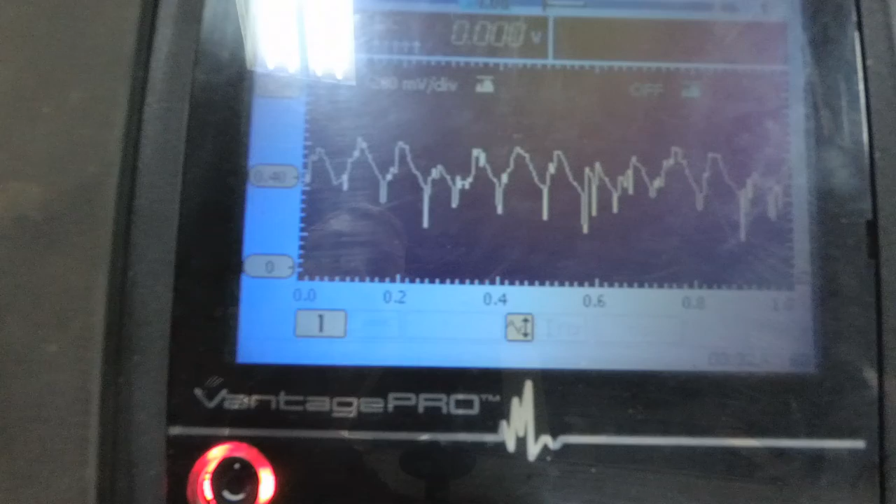In addition to that, it sets a fault code for cylinder contribution on cylinder 3 and cylinder 8. And cylinder 3 and cylinder 8 are 4 cylinders apart. So that could be 3, and then the next one down here would be number 8, or vice versa, it doesn't matter. So this engine needs major engine work.

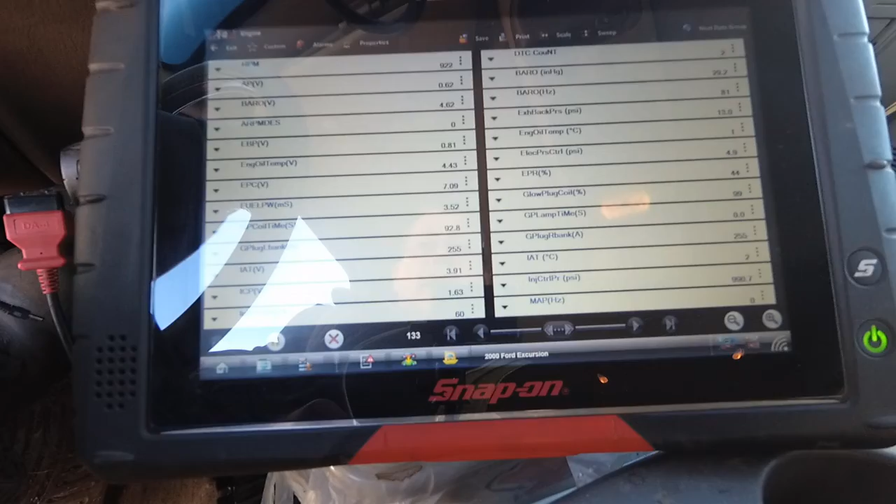Okay, I'm about to start this truck again after a cold sit. Wait light's off. You can hear the cadence of the engine. There's at least one cylinder, probably 2, that are misfiring. Definitely cranks a lot faster. We'll have a look at cranking RPM on this recording here.

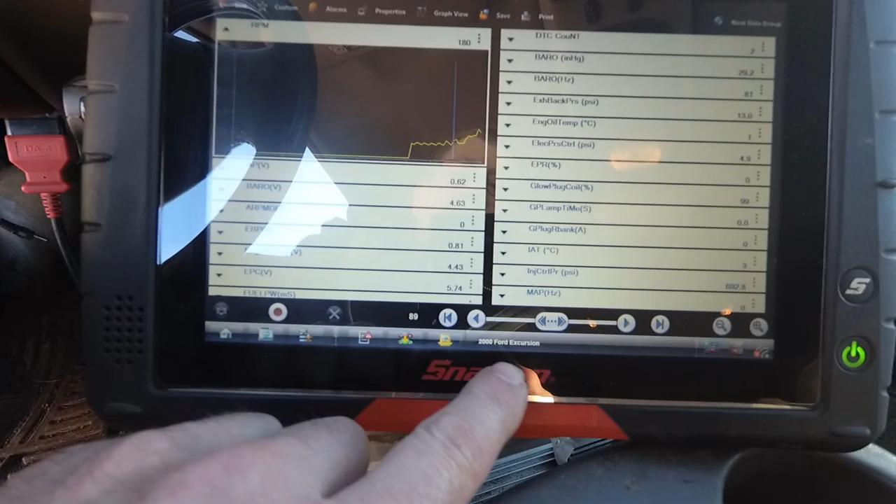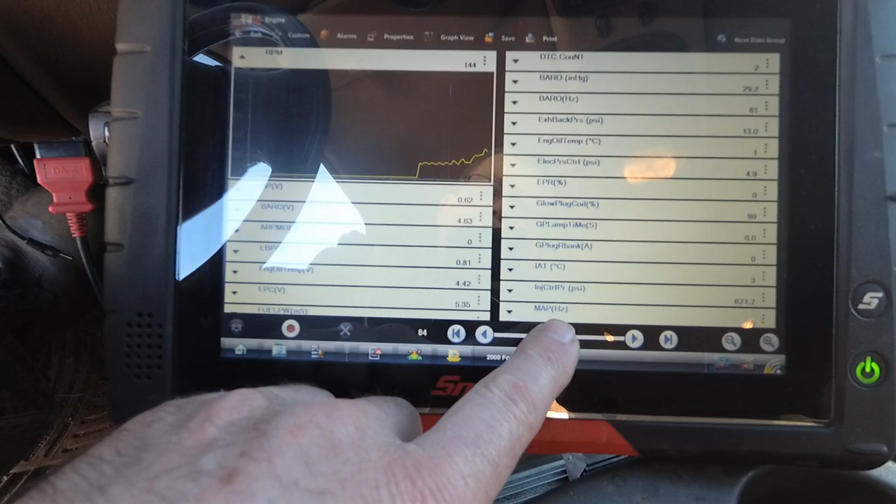180. That helped with the fresh batteries in it, but the engine's just tired. It's about as good as it's going to get.